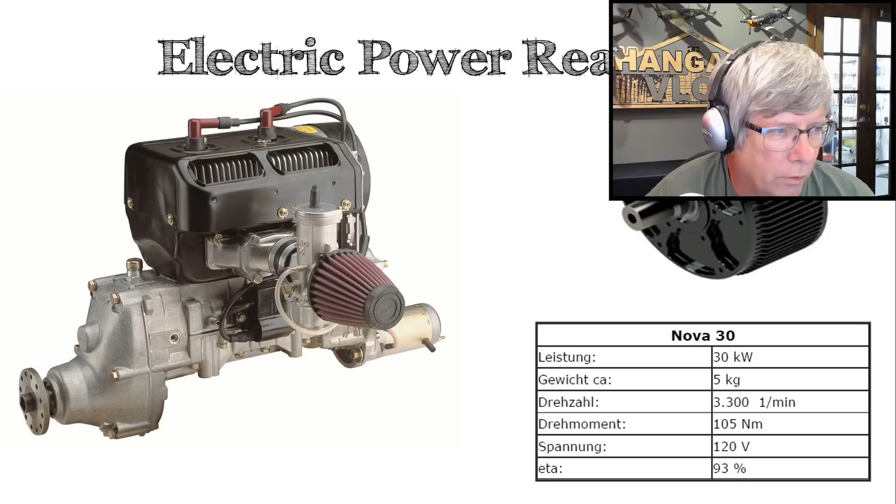But before extolling the virtues of electric power, I want to talk about some realities. Here's the typical ultralight engine, the Rotax 447, probably one of the most popular ultralight engines ever built. Rotax builds an absolutely beautiful piece of equipment, but that motor with the electric starter and B gearbox is about 93 pounds. On the right I have a random motor I picked, the Nova 30, also a 40 horsepower motor. That 40 horsepower motor, instead of 93 pounds, is 11 pounds.

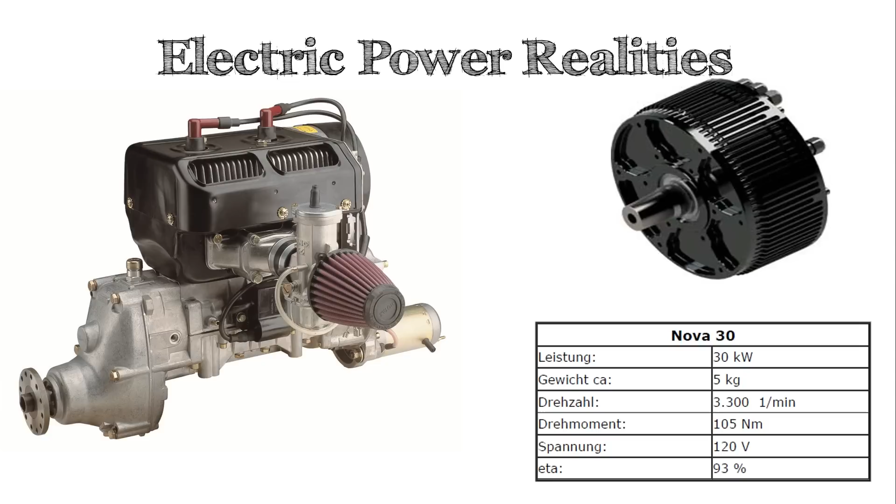Now, 11 pounds - we need to add more stuff to make this fly: a prop hub, a controller, a bunch of wires. Let's say we end up at 20 pounds. That leaves us 73 pounds of batteries before we get to zero fuel weight. If we put these on an equal footing, flying the same amount of time at exactly the same weight, we've calculated a round number of around 23 minutes of flight time.

When you're talking 23 minutes of flight time, you need to realize that gasoline's energy density is so phenomenal that if we want to fly longer than 23 minutes, gasoline-powered equipment just runs away with the efficiency - there's no way we can compete. But if we want to fly less than 23 minutes, it gets exponentially more favorable to go electric. That's why the model airplane industry has gone bonkers with electric airplanes - we can fly for 10, 15 minutes and it's twice as efficient as gas-powered stuff now, plus all the other reasons we'll get a chance to talk about.

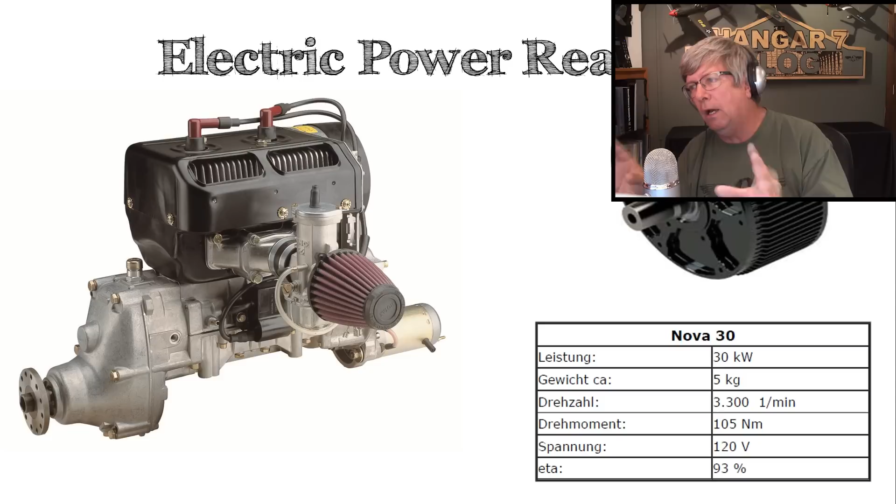That puts some reality in the real world. If you want to do cross-country flying, just stick with a gas motor - that is really a great advantage.

But one of the things that makes this so exciting is that it wasn't that long ago we were talking about flight times equitable to a gas power plant in the neighborhood of 10 minutes. And now we're at 23 minutes.

If you look at the curve of where we're going with this, I think last month one of the magazines mentioned we've now sold over 1 million electric vehicles in the world, and those numbers keep climbing every year. As that happens, the energy density gets better, the cost goes down. All of this will continue to improve as we get going. So the future is extremely bright for that very reason.

But let's talk about a couple of other advantages that help us build into where we're going with this EMG-6.

Cost of operation. Almost every operator has seen the writing on the wall here. For the EMG-6, a typical 1-hour flight costs just a couple of bucks for the electricity to fly that thing. We'll eventually get to where batteries are modular. You fly for an hour, come down, put another one in, and go fly for another hour. Classic training scenario. It's going to be a perfect scenario for the thing. So the cost of operation starts to play into the picture a little bit more.

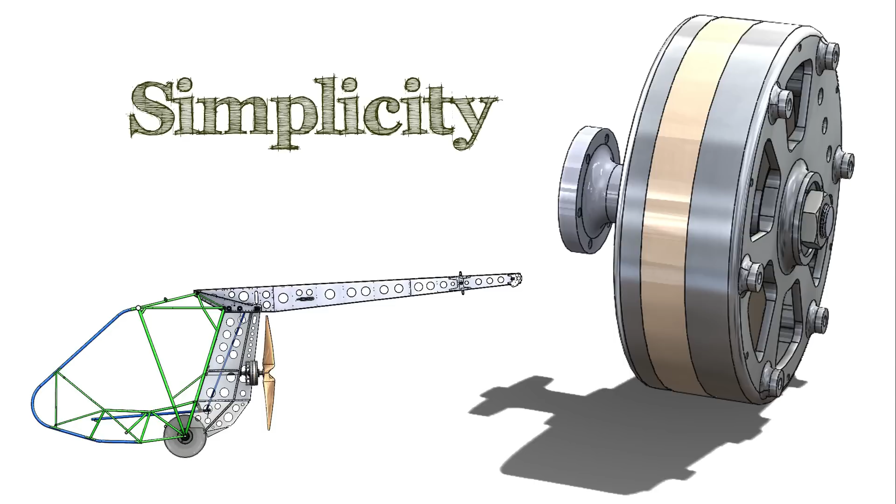How about if we talk about simplicity of an electric power plant? This little motor I've got drawn in SolidWorks here on the screen is being built by a company in Southern California, and we're going to be doing all the testing on the EMG with this thing. This is a motor that has one moving part on two bearings. Now think about all the thousands of parts in your typical engine today to make that thing run. When we're talking about one moving part, we're talking about exponential simplicity compared to even a turbine engine.

And the size of these things makes them modular. This motor, being built by R&D, we anticipate the TBO to be 10,000 hours of operating time before we have to overhaul it. Well, that's horrible, only 10,000 hours, and then we think, what's the cost to overhaul this thing? We anticipate about $200 to do a complete overhaul on this motor.

When you start talking about electric and comparing it with a gas engine, with these kinds of numbers, you can't help but be excited about some of the possibilities. And the reliability and all of that other stuff.

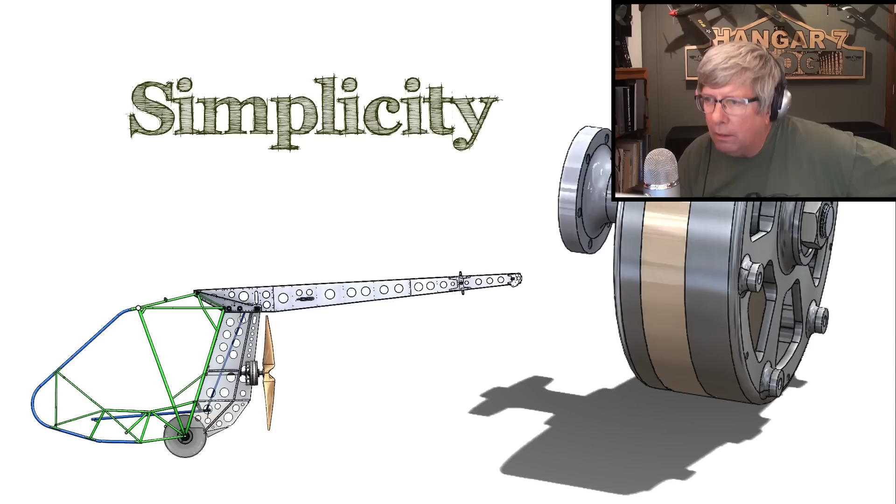You're not out there with a choke lever, priming the thing, pulling on the handle, jerking it on and off trying to finally get it started, and then only after it starts you have this great big 15-minute warm-up time, and you have to be careful about shock cooling the thing. All of those things disappear in an electric power plant system.

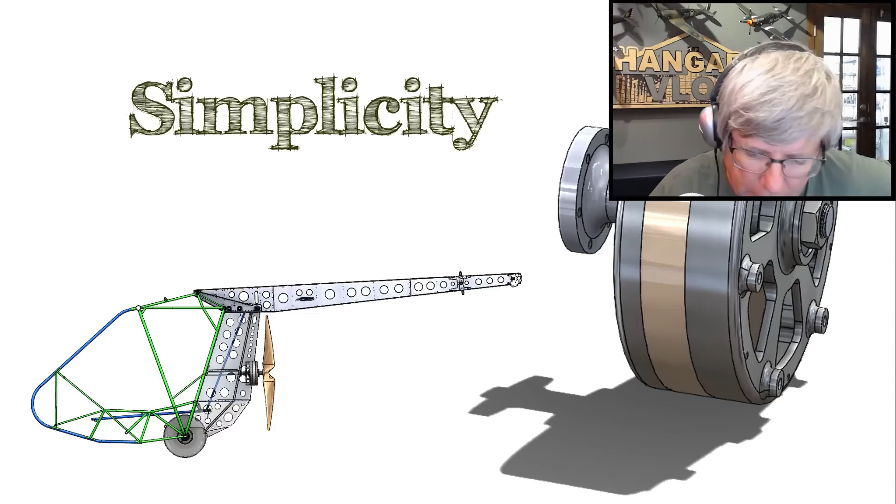So just from a simplicity standpoint, you take a little rheostat on your throttle switch and just run it right on up. When we were flying the first prototype, it was so fun. You just shut the motor off, and then at any point in time, crank the power up to whatever setting you wanted. The motor didn't care. You just select whatever setting you want.

Let's talk about regenerative power. Many of the power plant systems available have the ability to go into regen mode. So like in a car, when you slow down, you use the motors themselves to regenerate electricity and act as brakes also.

But imagine this scenario. We've gone out into the valley someplace, found a place to take off. We launch and fly 10, 15 minutes over to a ridge where there's awesome lift. And once we're in this lift with all this excess energy, we can go into regen mode and recharge the batteries while we're cruising this ridge.

That now gives us, even if we're only carrying 20, 30 minutes worth of batteries as a standby, all kinds of options, especially as a glider. If we're out there cruising a little too far from home, we've got 30 minutes of flight time to cruise on back.

Or let's say we want to fly to a different site. We've got 30 minutes to do that, and then regenerate power off the next ridge we come to. All of these things are really going to change how we think about this electric power stuff.

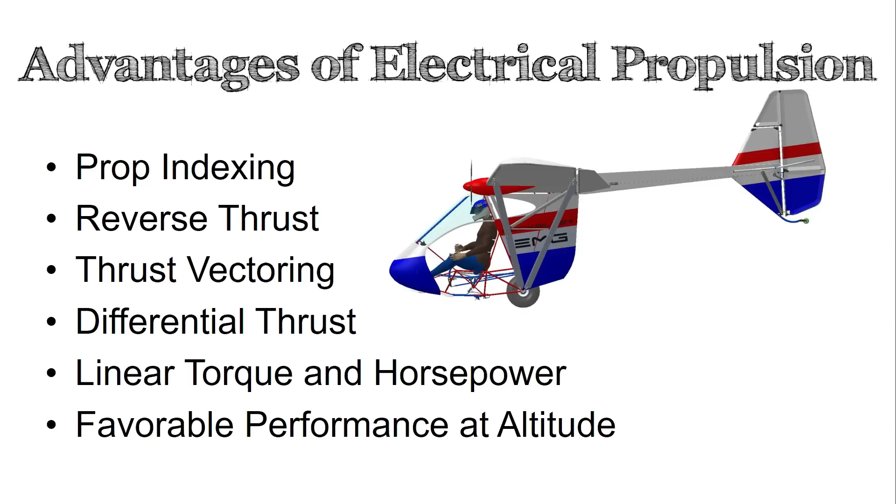With that being said, let's talk about a couple of other things we're going to see. These things aren't pipe dreams. These are things happening in real life right today. Prop indexing: with an electric power plant, you can select where you want the prop to stop.

Horizontal, vertical, wherever it's going to produce the least amount of drag. Maybe you want it horizontal for landing so that if you're off-field landing, you don't get it stuck in the weeds or hit some bushes or something.

There isn't any reason why we can't utilize maximum reverse thrust on these things. So now we have thrust reversers. How cool is that? The ability to go into thrust reverse on an airplane that takes 50 feet to land, and now we've got thrust reversers to even help with that. That's going to be pretty neat.

Thrust vectoring. We're going to see, because of this whole new concept of having what we call distributive thrust, distributive power, where we can take multiple small motors and place them all over, and then control those independently from each other.

The ability for many of these airplanes to change the position of the thrust momentarily for landing, for example. You're going to see tons of new airplanes popping up where we're able to put the props into the normal cruise configuration, and then just before landing, reposition them like a quadcopter, go full thrust for just a few seconds to make the landing, and that will totally change our short field takeoff and landing type aircraft. We're going to see more of that.

We've already got on the drawing board a thrust vectoring version that fits two motors onto the EMG-6.

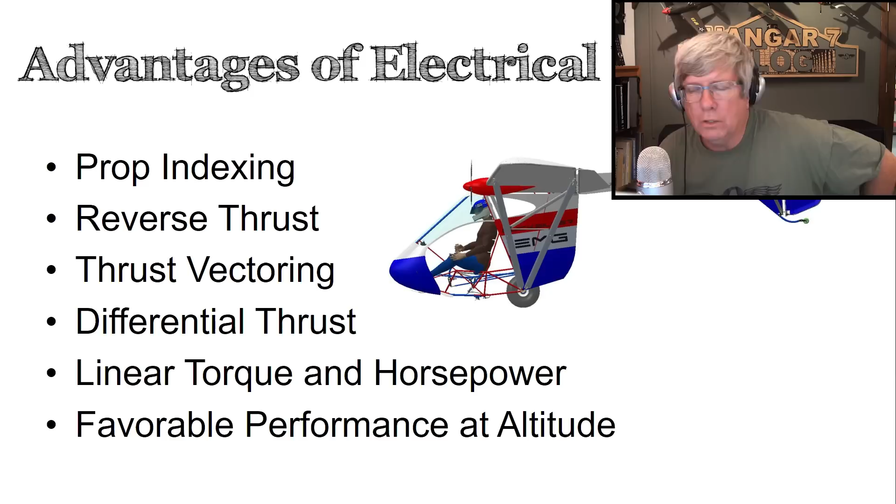So what? Add more juice to the thing and just compensate for that. It's relatively a fairly simple way to go about doing that.

So with all of this stuff that we're talking about, we just saw many, many applications where we could put this into the EMG-6, including quiet operation.

We've got so many of these airports that are constantly under threat from the public closing them down, saying there's too much noise, restricted flight patterns, and stuff like that. Nobody would be complaining if these things were quiet.

If you're interested, Brien Seeley from the CAFE Foundation has this presentation he puts on dealing with pocket airports in downtown San Francisco. The whole concept is based on being able to reduce traffic and congestion in downtown San Francisco and be able to fly to some small airport in an outlying area.

But because of electric power, the ability to do that without the noise really seems like a viable concept. So that kind of stuff can't do anything but make life better for everybody in aviation. We saw that as a positive aspect also.

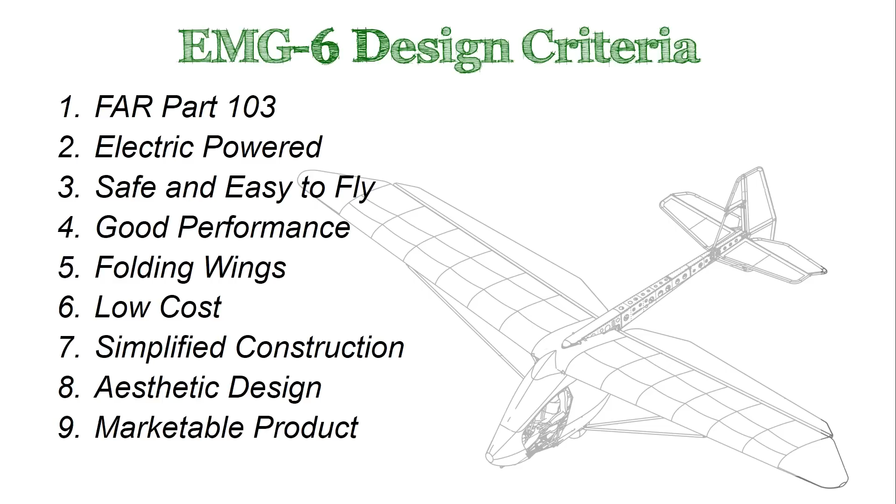And all of these other ones - number 6, I want you to look at real careful, because keeping the cost under control has become a passion of mine. So with that being said, let's talk about how this design got started, where we came from, and a little bit of history behind some of this.

The EMG-6 project was started back in 2012, and at the time, Quicksilver had just changed ownership, and the new owners of the Quicksilver company decided to become collaborators on this airplane project, and at the time they were building about 25% of the parts on the EMG-6. I thought it was going to be a great collaboration, but in late 2014, Quicksilver announced their bankruptcy, basically called up and said, would you like to buy the company? And of course that wasn't in our budget or in our business plan at all.

So anyway, we were left hanging. It set the project back about 12 months and probably in the neighborhood of about $60,000. We've been, for the last couple of years, clearing all these hurdles to get back on track, and we're actually doing really good right now.

Just before Oshkosh AirVenture 2016, we got the prototype number 2 flying, and we got a couple days of flying on it before we took off to AirVenture.

This whole original design of Quicksilver, utilizing the simple design that we have here on the screen, we were using a lot of the Quicksilver components because we simply didn't want to, why not utilize some of the technology they'd already developed. In fact, these wings are basically a modified Quicksilver GT400 wing.

We then flew about 50 flights with the electric sustainer motor on the thing, which we're going to talk about in a little bit. And then we've flown almost 30 hours with the Polini 250 two-stroke engine, and we'll talk about that as well. Each one of the tests we were doing was basically centered around flight testing for different configurations on the thing. So we had a very strict flight test program during all of this stuff. We ended up with very happy results on the prototype. We were extremely satisfied enough to keep pressing on with the whole program.

Just to give you a little bit of the performance specifications here, wingspan's about 37 feet. One of the criteria that we had is it had to be able to fit into a hangar without having to fold the wings or take the wings off like a conventional glider. It has about 170 square foot of wing area, and we've designed a 750-pound gross weight, which we'll talk a little bit more about.

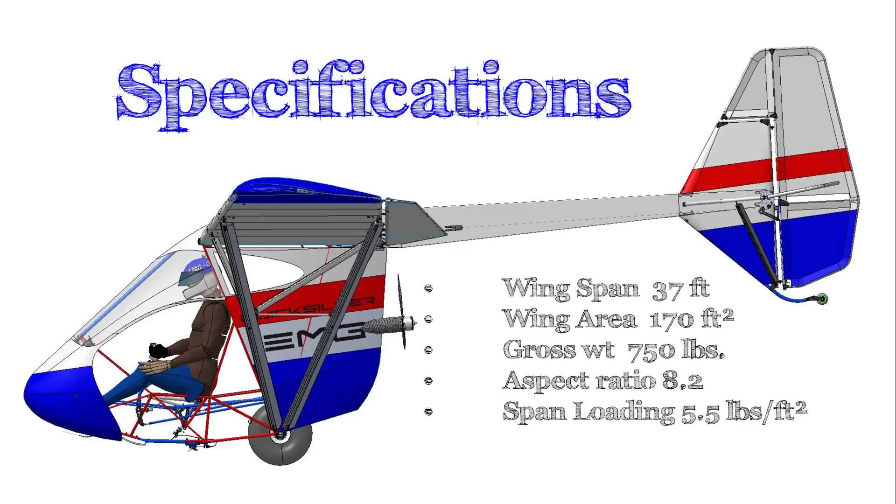As far as the performance characteristics of the airplane, the original prototype had a little bit slower wing on the airplane, and so we ended up with a best glide speed right around 40 miles an hour and a minimum sink at 35 miles an hour, and a VNE we've designed in at 90 miles an hour on the thing.

We typically like to tow the airplane when we're doing ground tow or aero tow in the neighborhood of 35 to 60 miles an hour, and 60 is about as fast as we've done so far. We may be able to bump those numbers up just a little bit more, especially on the number 2 prototype. It's kind of a different animal entirely than the original ultralight version of the thing.

Performance on the original prototype was very crude, but we had a glide ratio of about 13 to 1 - about your average hang glider glide ratio - and a minimum sink of 280 feet per minute. 280 is the key number because one of the best ways to reduce drag is to go slower, and this airplane with its large wing area lets us get into the minimum sink speed at about 35 miles an hour. The thing is just a floater.

Launching to 600 feet on the runway and flying the traffic pattern, flying down over the high school and coming back around for a landing, doing that over and over again. Tons of fun just to be able to do those short flights like that.

During flight testing of the aircraft, we typically have three flight data recorders recording information of different types on each flight. It helps us build real live data that we can then analyze.

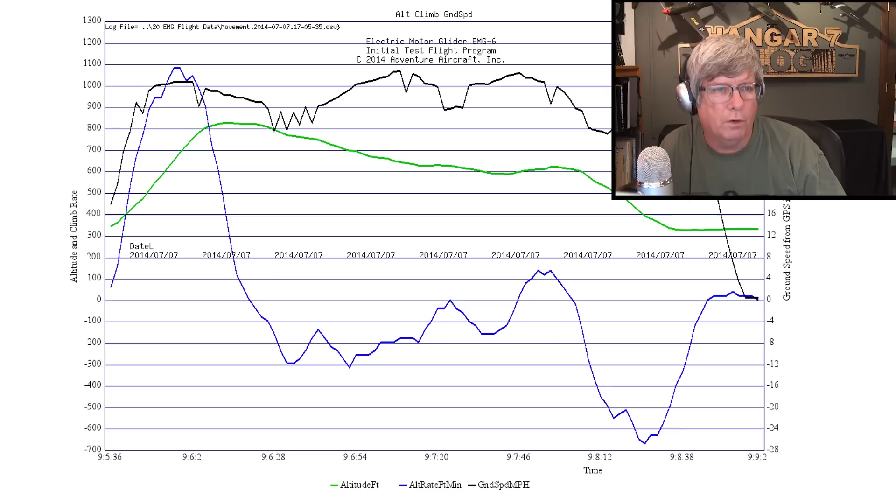This data is off of the variometer, and it shows us launching, climbing at a little over 1,000 feet a minute, and then going into glide configuration. It shows a couple of spots where we're down to about a 300-foot sink. Then this is a powered flight - later on, this isn't a very long flight, but we powered up, and you can see once we power up we start climbing back up to zero. We were actually able, even with the little Predator 37, to climb for short periods of time at about 125 feet a minute.

But we'll talk about the Predator 37 and what happened with that.

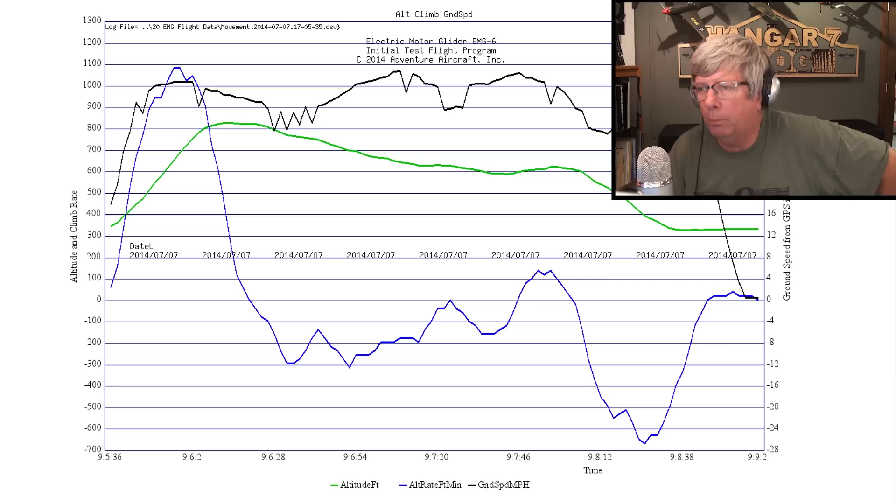That was our design criteria from the very beginning, because this motor technology is so fun to watch but changing so rapidly - every week we see new stuff coming out. It's kind of like your cell phone: the minute you've bought one, there's a new model out and you just can't wait to have it. So we wanted to make this stuff modular, able to move from one airplane to the next, allowing builders to upgrade to newer technology as it became available.

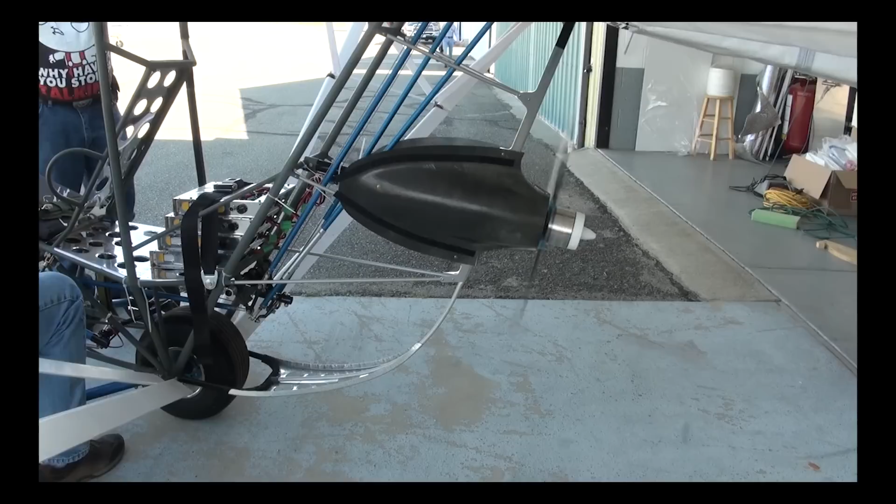Originally, we decided to do a test on this Predator 37 motor. This power plant package in the original prototype is basically all off-the-shelf model airplane stuff - the motor, propeller blades, controller, batteries, chargers, everything you can buy right today. We built a couple other things, like the little cooling fan on the back and the little spinner, to help with cooling. Our original goal was just to use it as a sustainer and do some evaluation on the motor to see what we thought about the whole thing.

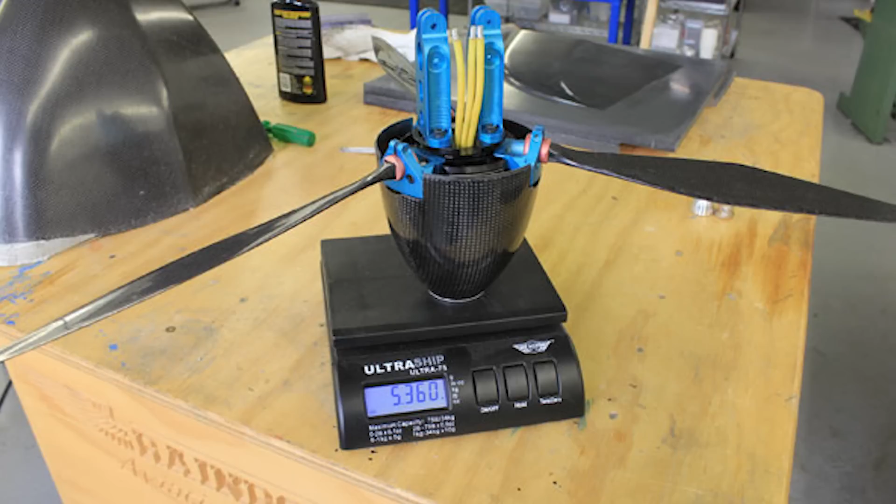This is actually a 16 kilowatt motor - basically 20 horsepower at 6,300 RPM, spinning a 33-inch diameter propeller. This thing is small - the propeller blades, propeller mounts, motor mounts, motor, cooling fan, and spinner all together weigh 5.3 pounds. Absolutely incredible, and it puts out 100 pounds of static thrust - well, 99.3, I think, is what the manufacturer says.

We were never able to get that kind of control out of the thing, but we were getting some pretty good thrust out of the whole thing.

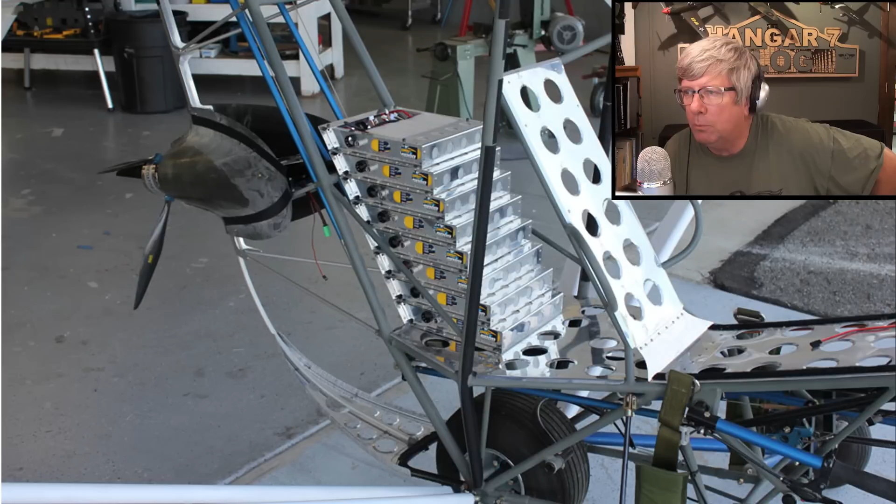We developed an entire battery mount system where we could simply take Zippy 5000 model airplane batteries, cheapo Chinese-built Zippy 5000s. We built a little board to safeguard each one of the battery cells so they'd have circuit protection built in. But we're just using them off the shelf, and we'd stack these things into what we'd call modules, and each module could be stacked on top of the next, and then we could select how many modules we want based on what we were going to do.

Here was a basic configuration we never did use, but with this many batteries in the back, we had computed that had we been able to use the power out of that electric motor, this would be about an hour's worth of flight time. So we ended up using 4 of these modules for almost all of the flight tests that we did.

Those flight tests involved basically going up, running the thing until the motor would start overheating, and then landing. With 4 battery packs, we could typically get about 4 launches, and a total of almost 30 minutes - in fact right at 30 minutes doing it that way.

500cc four-wheeler, and it'd tow that thing just great. In fact, it was really fun to tow behind it because it couldn't take off too fast - I'd drag it back down if it got going too fast. So anyway, we did a lot of ground tows with the thing. We had over 100 tows on the aircraft so far on the original prototype, and we ended up developing a tow system that worked really well.

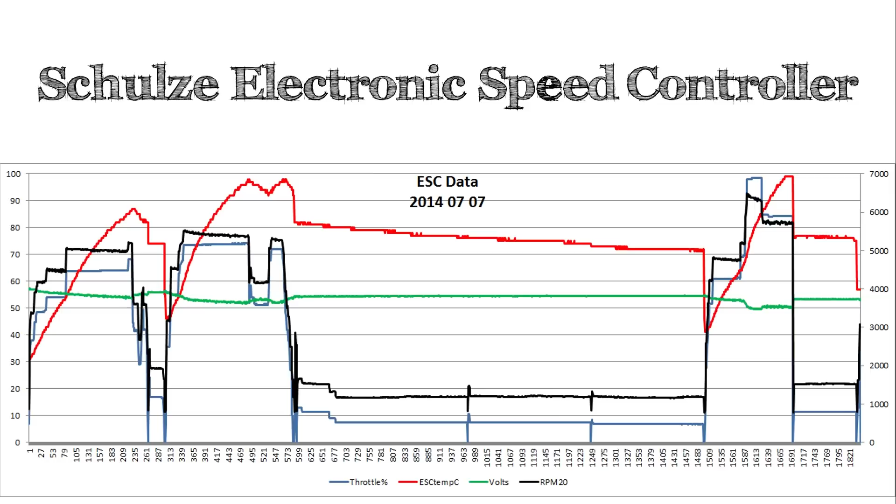And on this one, we've got a video of this. We're just out there cruising around, we were fat, dumb, and happy, and it just shut off on us, so we had to land the thing. But it's a glider, so no big deal. You can see kind of the throttle versus the RPM following. Really good data though, provided us a tremendous amount of information.

And so right after we had this problem, we just decided, well, we just need a little bit more cooling on the ESC.

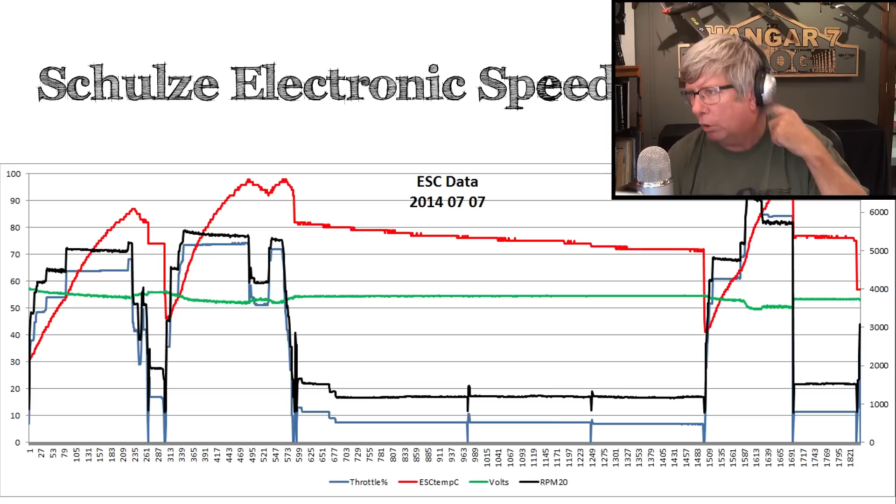So our next step was we went to Lowe's and bought a CPU cooler, I think it was $97. We machined out a little flat spot on the back of the ESC and bolted that thing right to it. That solved all of the cooling problems. The temps went way down, and all the problems on ESC temps disappeared. The ESC was never a problem anymore—it was no longer in the picture in terms of limitations.

The next problem was, of course, the motor. We never did burn up a motor in air, but we could see we were starting to get motor sensor temperatures that were too high. The problem was the speeds we needed to maintain to use it as a sustainer motor—even with our plan to put two on the wings—the RPM necessary to provide thrust with that propeller just wasn't adequate. Even with two motors, we identified it wasn't going to work out, so we moved on to the next step of testing.

That's what left the Predator 37 in the dust. Even though it's a viable option and kind of fun—we could use it at lower power settings, a little here and a little there, and keep it under control—it wasn't where we're going. We needed something that's going to be a commercial product, so we abandoned ship on that.

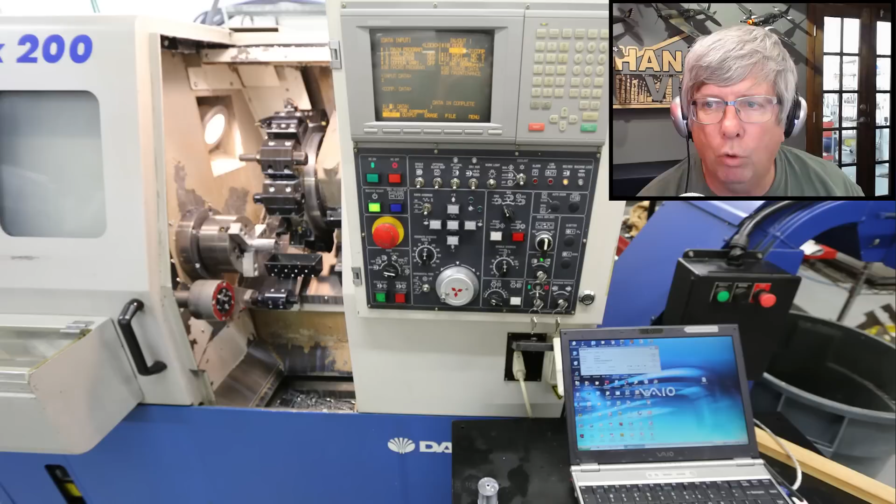It also took us a lot of money and a lot of time. We had to accumulate a whole bunch of new machinery in order to accomplish this, so we ended up buying several new CNC machines. But now that we have all of that capability in-house, we have 5 CNC machines that we can do different types of manufacturing with.

Right before Oshkosh, we finished up the prototype and had it ready to put in the trailer. We literally ended up getting 2 test flights on the airplane, 2 days of test flying. The first day we did half a dozen or so ground tows.

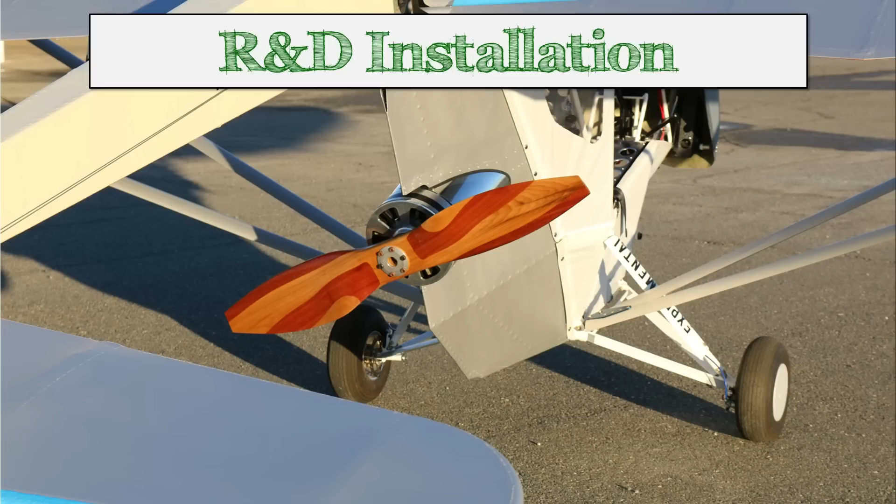So the next electric motor that we're going to test, we have in-house now. It's not completed yet, but R&D is a company in Southern California. They're actually an electrical aerospace company that does electrical cables, but they've got a whole bunch of really sharp people down there, and they decided to build this motor.

We actually became friends with them during one of our 120-hour courses, and they just took this on as a side project. But they've got some pretty sharp people, and they're actually right now about 96% efficiency on the motor. It's designed to be able to operate continuously at 20 horsepower. It's only a 24-volt system. They wanted to be able to make it redundant and safe, so they selected 24 volts.

They've lost their lead engineer, so we're waiting for them to get up and swinging again on this thing. The lead engineer on this project transferred to a new job, and they've been kind of hamstrung in that area. So that's the next one we're planning on testing.

We've got other things in the works, but I want to talk about what I see as the total game changer for everybody. When Paul originally formed the EAA, aircraft were being built with Volkswagen engines, McCullochs, and military surplus stuff. With the numbers we have in the experimental world, it's very hard for any manufacturer to really make a big dent when it comes to making a product, and that's normally the reason aviation products are so expensive. We just don't sell the numbers. But think about this for a second.

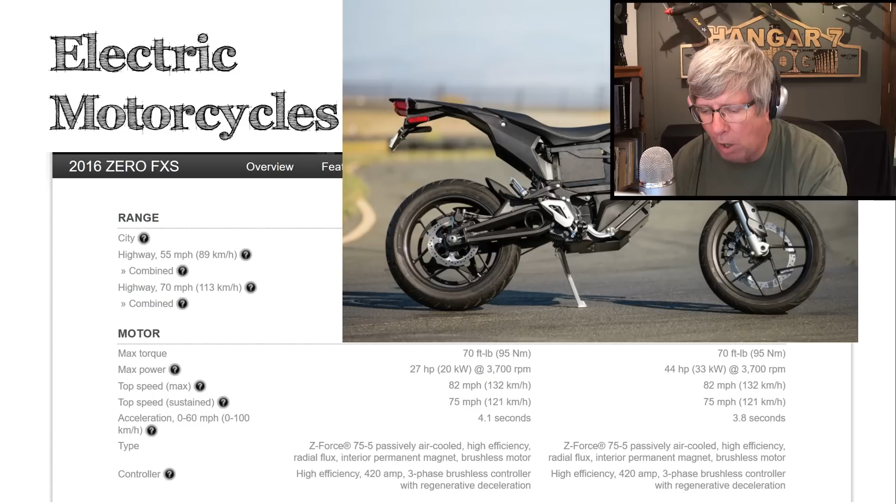When we start talking about junkyards and crashes and mangled up stuff, or even buying a new motorcycle, take advantage of the subsidies, steal all the good stuff, and then sell the rest of the brand new motorcycle on eBay for spare parts. You're probably talking a pretty cheap way to go. There's a bunch of other manufacturers out there doing exactly the same thing, and we're seeing more and more electric motorcycles all the time. We're going to have some options in the not too distant future that are just going to be awesome for the electric world, so we're looking forward to that.

Remember in the beginning I said one of the areas I'm really excited about is the cost. We're doing everything we can to get the cost of these kits down. If you're a welder and you're going to build your own stuff, you can buy the basic kits for this thing, and we think you'll be right in the ballpark of $10,000 to $12,000 for the cost of one of these airplanes.

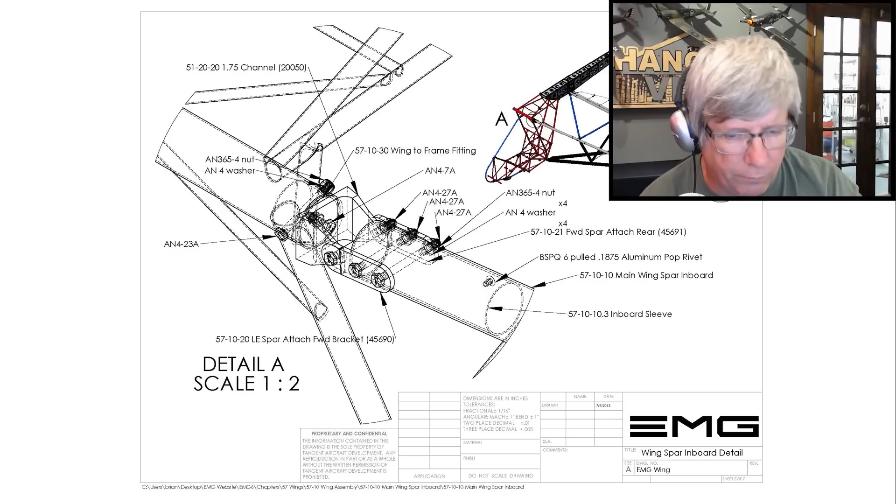We've gone to the step of making all of the plans available online for free. You can go to our website, go to the Builders Database, and download all the PDFs you want. We're going to eventually get some money out of you, but we believe in this whole process. We'd like you to be able to take the time to go look at all of the drawings. We continually add to them and continually upgrade the things.

They're all designed on A-size drawings, designed so that you can print them on your home printer. You're not going to have to do a whole bunch of weirdo stuff to be able to do that. They're all designed so that you can use them on an iPad or some other laptop device.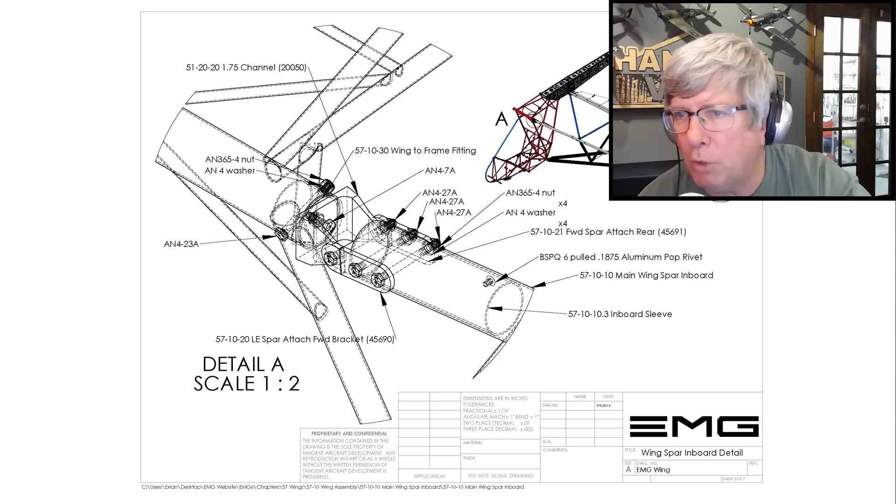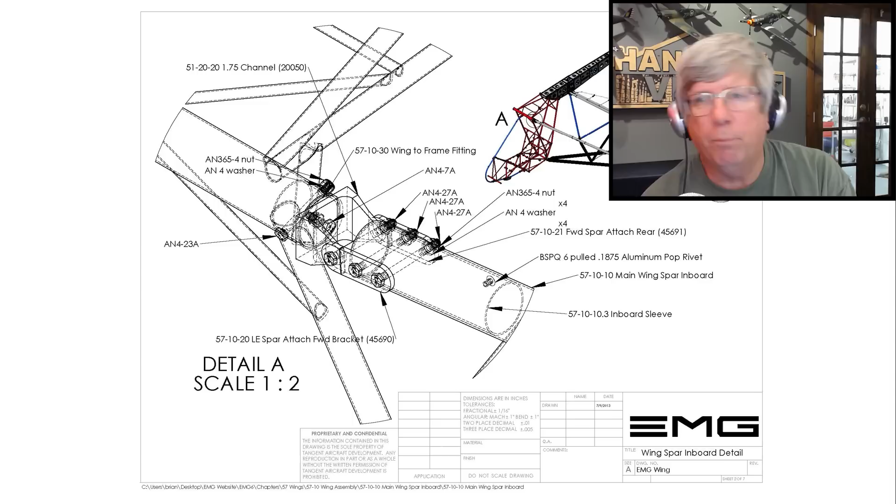We have a lot of builders who simply take their iPad right directly out to the workshop and work right off of that. In addition, we've provided a whole bunch of other kinds of files on the website for free also. Because this is designed in SolidWorks, there are many e-drawings, and you can download a free copy of the e-drawings viewer and simply grab the part and start rotating this thing around.

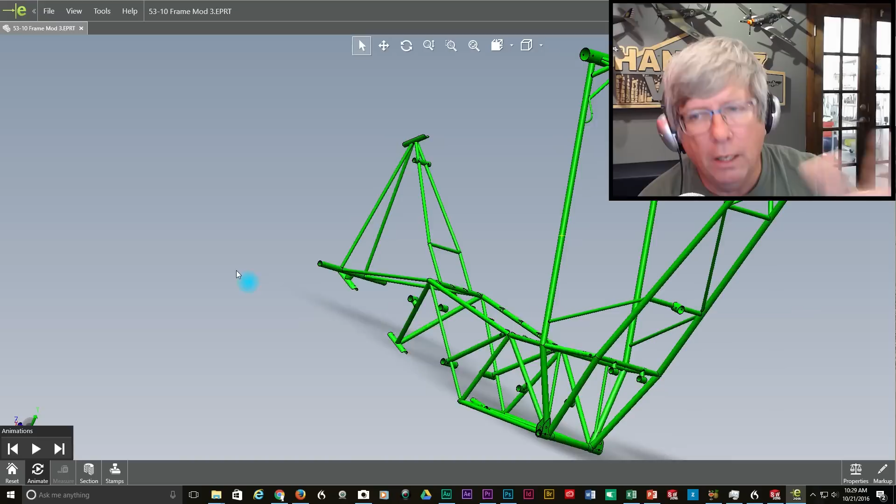You've seen how we operate and manipulate 3D drawings. You can zoom in, look at something, cross-section it. It's just amazing what you can do. All of those are on the website as well for free.

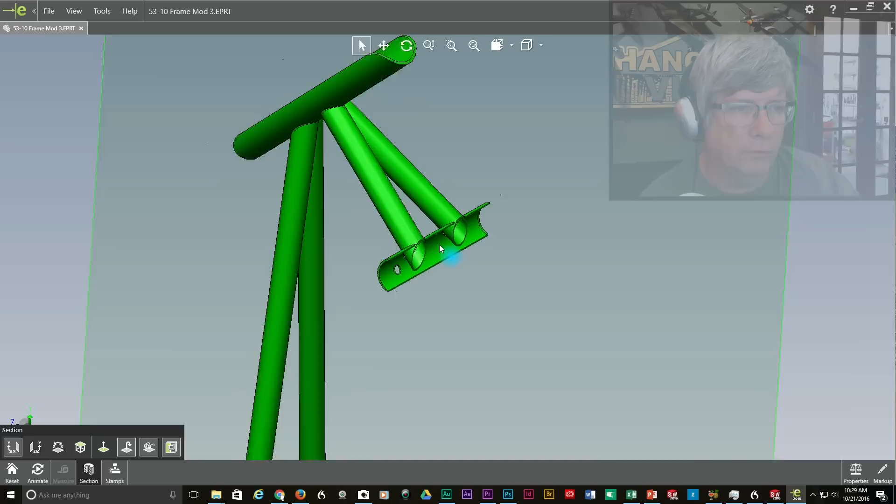This airplane has a 4130 steel cage on it. It's very user-friendly, and it's one of the most complex parts on the airplane, so that's one of the areas where we wanted to provide you the ability to build that yourself so that you could reduce the labor costs to make that stuff.

We've provided not only all of the drawings to be able to do this, but we've really come up with a super trick system for cutting all of the tubes on the airplane. We have this template system, and if you haven't seen how to do this, we've got a couple videos on it that you can go watch. We simply print this on your printer at home.

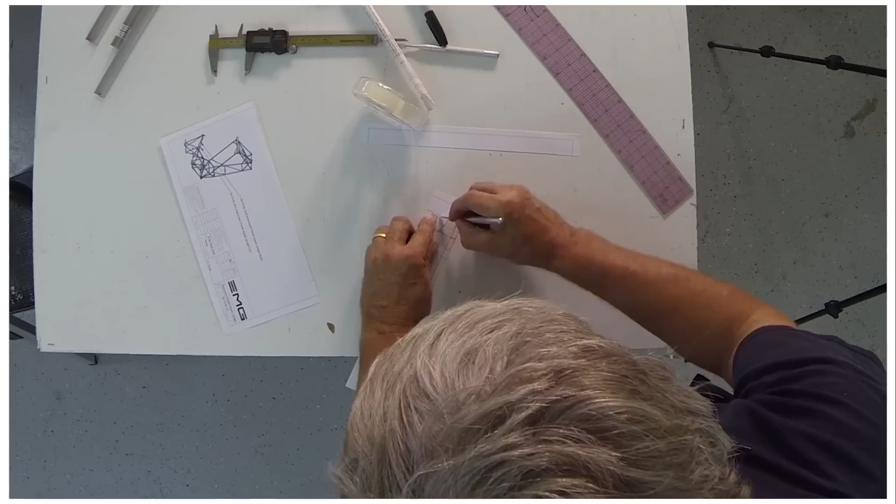You cut it out with an X-Acto knife, wrap it around the tube, slide it to one end, mark the end, slide it to the other end, mark the end. There are some interim marks as well, and it's like having CNC cut tubing when you go to fit all this stuff up together. If you're a welder, you'll appreciate this tube marking system rather than cut and fit and then weld up the 3/4 inch gap that you just made.

This is just phenomenal. It's exactly the same system we use in the shop to create the frames. We're not doing it any different than the builders are doing it. Now, not only are we making all these templates in-house, we're building the fixtures in-house so that we have DXF files. You can literally either rent the jigs for these things, or you can download the DXF files, take them to the local cabinet shop, and cut all these things out on MDF plywood or 3/4 inch plywood and make your own jigs if you want to.

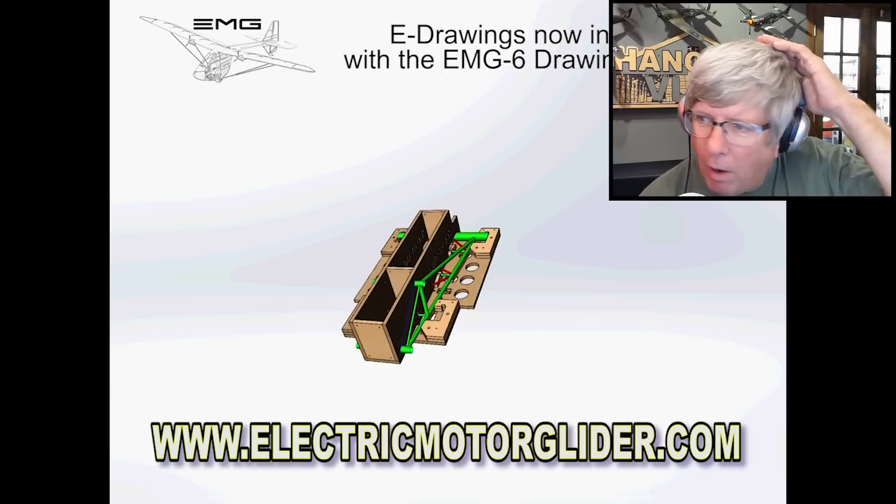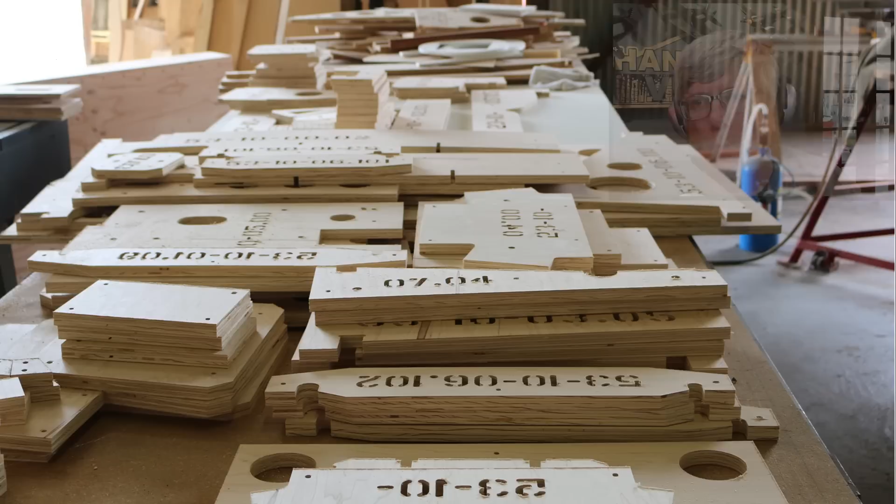Our goal is not to sell jigs, but rather to rent them out, and that's kind of how we've been pushing this whole system. You borrow the jigs for a little while, basically $50 a month with a $500 deposit, and when it moves to the next person, you get your deposit back. It usually only takes about 2 months, like it took Charlie to put his frame together, and then he moved the frames down to the next builder.

All of these parts come boxed up and pre-manufactured. When you're building the parts on the airplane, you're using exactly the same jigs that we use in the shop to create the thing. It shows up in a box like this where all of the fixtures fit in there, basically 4 pieces of 4x8 sheets of plywood in order to make all the fixtures.

Ed Santucci in North Carolina is one of our builders, and he's been taking the drawings and making his own fixtures that are much simpler. He obviously knows what he's doing, and he's been adapting that, and we've agreed that we'll supply him with any dimensions he needs in order to succeed at this whole process.

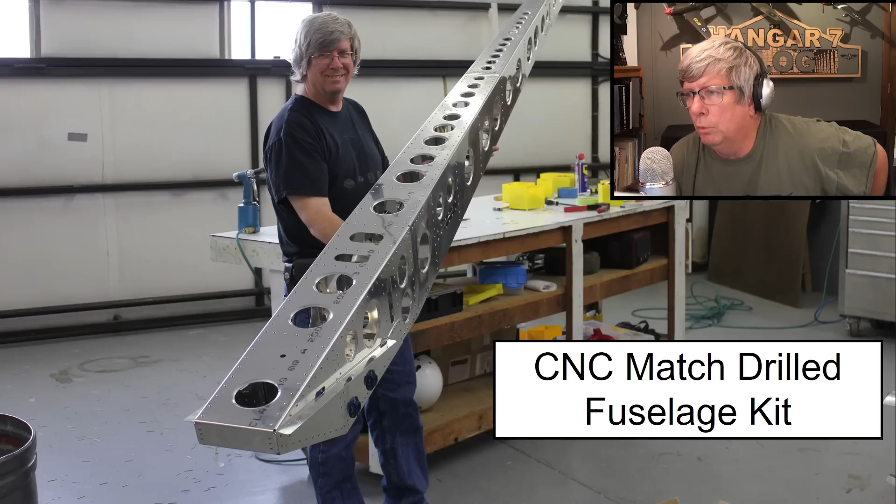The fuselage boom is a 2024 T3 aluminum fuselage boom. We've created all of those parts, CNC match drilled, basically Cleco and pop riveted together. It takes Jason in our shop about 4 hours now, and he's finished with that sucker. He's getting pretty good at it.

But even if builders wanted to build these parts themselves, like the bulkheads, we've got drawings where you can do that. The whole goal, of course, on something like this where we've got match drilled parts, is why not just throw them up on the CNC router, cut the parts out, and bend them up ahead of time so that everything fits perfectly. That's kind of how we've been doing that.

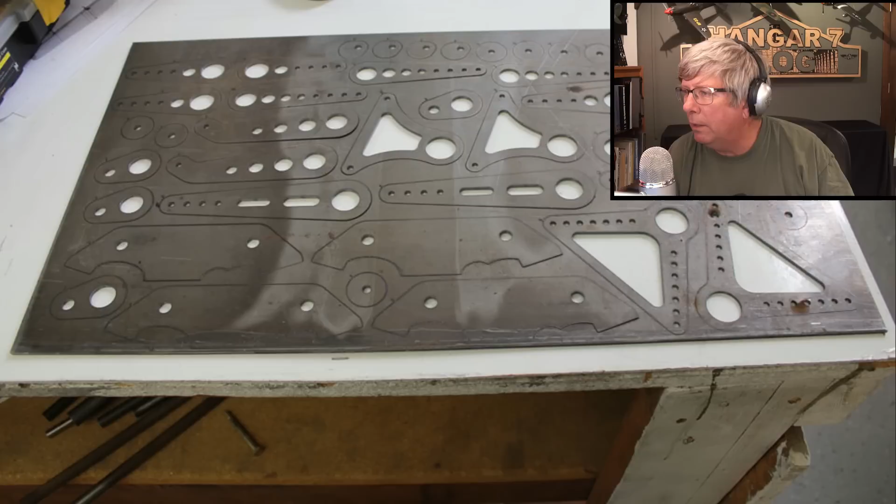In addition to the sheet metal parts, we've been outsourcing all of the steel parts with laser cutting. But oh my God, the cost they get for laser cutting these things is ridiculous, so we're still cutting a lot of them in-house with our mill. Kind of a harsh way to do this, but boy, this laser cutting is pretty awesome stuff.

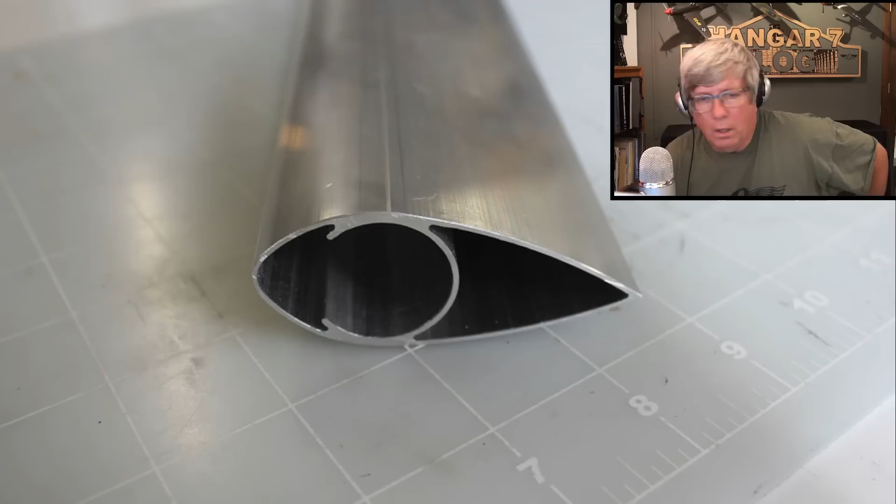We are also trying to build the airplane as simple and low cost as we possibly can. For example, the wing struts are the basic original Quicksilver 1-inch 058 6061 T6 aluminum tubes, and that's how we flew the prototype. Then we retrofitted them with a wooden trailing edge, covered them with fabric, and increased the performance. If you want to go the next step up, we've got 6061 T6 aluminum extrusions that we've made that retrofit directly, so you can start off with the basic stuff and upgrade as you go.

We want the airplane to be simple, but we want to allow those who want to make this thing more high-tech to be able to. That's why we did all of the enclosures and that kind of stuff later on.

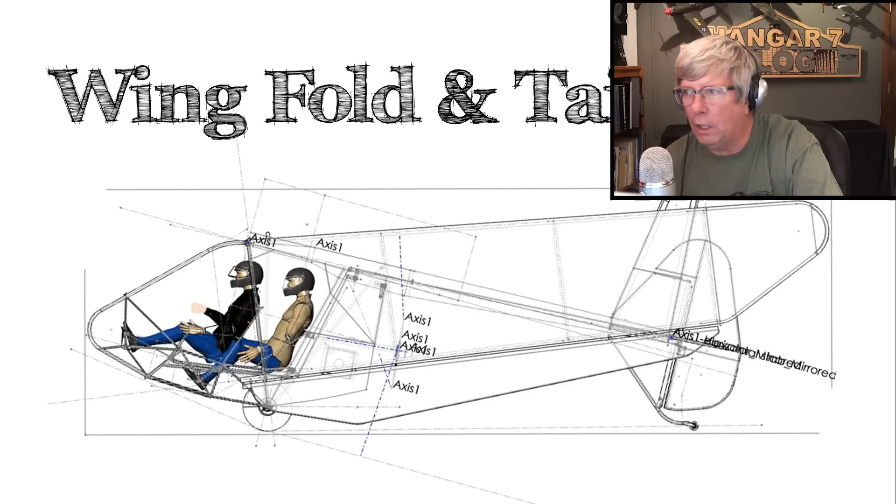Wing fold and tail fold. The airplane was originally designed because people need to be able to fold this up and put it in a trailer, so we've designed that into the airplane. The original prototype folded up pretty cleanly. We were able to get it into the studio at EAA for one of the Hints for Home Builders sections because it folds up. It's actually only 33 inches wide in the completely folded position, with the mono wheel and training wheels to keep it from tipping over.

The new prototype number 2 still has a couple of bugs on the wing fold, but we're working those out as we go. The whole idea, of course, is that we want the airplane to be trailerable. That's a big feature for a lot of people, so we've been working that into the plans right from the very beginning.

The airplane is a 2-place airplane, but let's talk reality here—this is not your typical 2-place airplane. It has a gross weight of 750 pounds. The original ultralight weighed in at a little over 200 pounds, so that leaves us a substantial amount of weight.

We could put a couple of pilots in there and still be under 750 pounds. The whole goal is that we need to be able to do some transition training, maybe fly the thing around as a pure glider with access to either ground tow or aero tow. It'd be a great way to do basic training for people not familiar with the airplane. If you fly it as a powered airplane with a little 2-stroke, at 750 pounds you're going to be restricted to basically a single-place airplane. Or maybe a smaller electric sustainer motor and a smaller passenger. But two fat guys like me, we're going to be a pure glider in those configurations. The whole goal is to provide options and different configurations depending on your mission for the airplane.

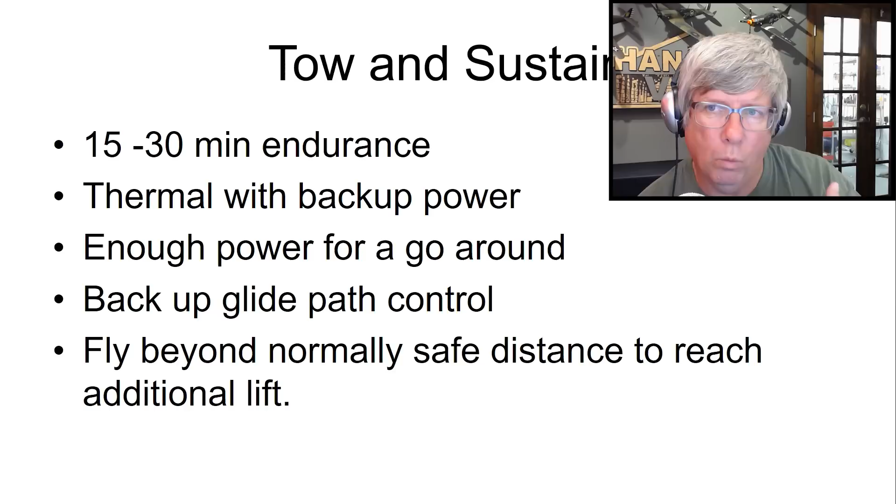And of course, the whole goal is to be able to fly long distances eventually, but our primary thing that we're doing is develop this airplane so that we can adapt to the new technology that's coming out as people build these new motors and stuff like that. We're going to see so many people develop so much neat stuff in the future. It's just going to be amazing.

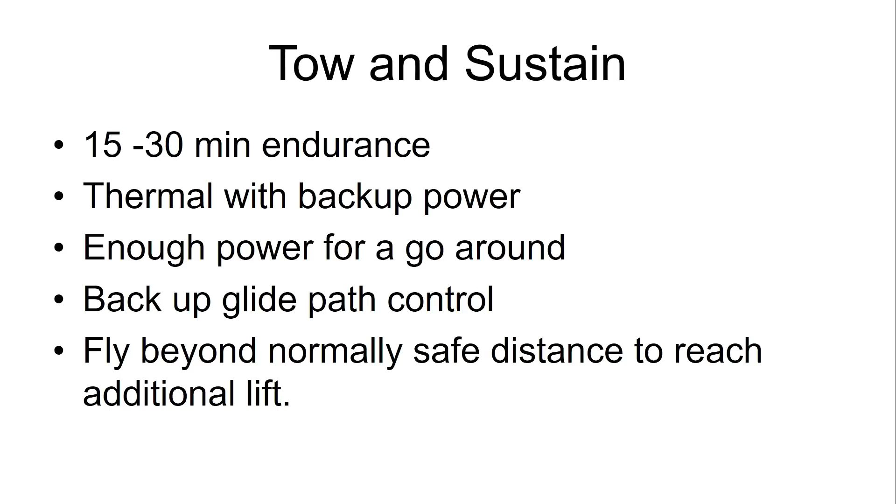But back to this way that we're flying the airplane right now, as a sustainer motor only, even with say 15 to 30 minutes worth of power. Remember, most of the time in a glider you're going to be out there cruising around catching thermals or flying ridge lift or something like that. But just to have a little bit of power to do things like a go-around, for example - that'd be kind of cool if someone pulls out in front of the runway on you. That's not really an option in the glider most of the time.

Backup glide path control - maybe you're a little short. Oh, that'd be nice to just have a little bit extra power we could add to the thing in order to get to the runway. Just that kind of stuff. With sustainer capability, we can go out and fly further than where we would normally because it's too far to get back to the airport. But if we get all hosed up and we run out of lift and we're in sink, just crank up the motor and start flying back to where we should be. So tons of options that we're going to have in that area.

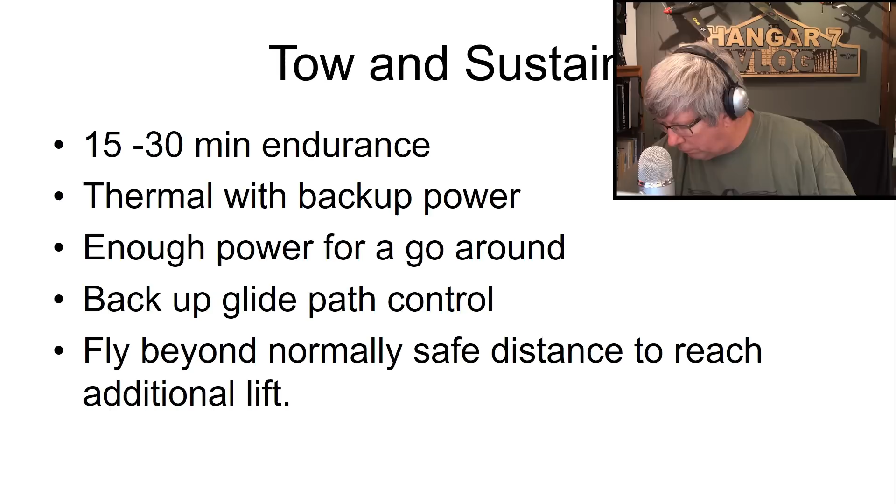So I see that I am running out of my time here. What time is it now? I think we're at 6 o'clock. I don't know how long. I don't know if you're there, Charlie, but I don't know how long I'm going.